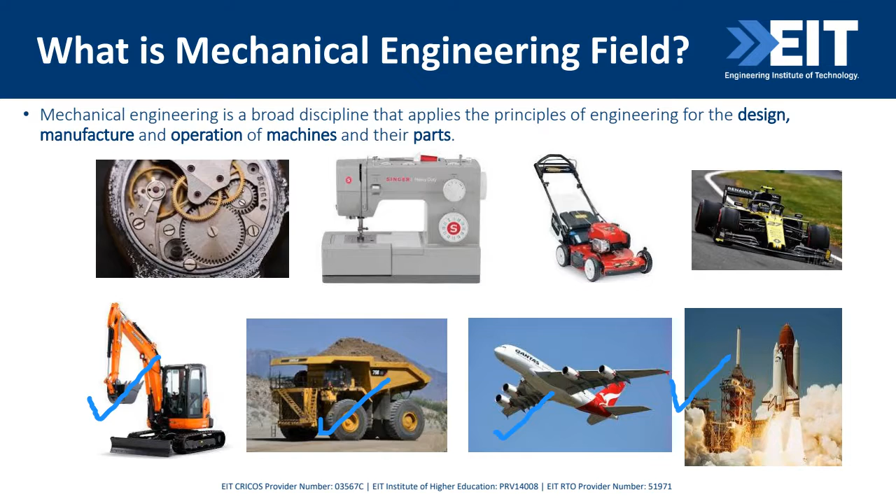All right, so moving on, elaborating a bit further.

So there's a lot of industry interest, and there are infinite possibilities in terms of mechanical engineering. It's really hard for me to think about any area which is not supported by mechanical engineering at any stage of the design process. You will need a mechanical engineer whenever you're designing something. So the field is that broad and that important, I would say.

To give a bit more idea, mechanical engineers create manufacturing facilities which would have large machines, a lot of automatic machines as well, and those machines serve so many other industries too. Mechanical engineers are also responsible for coming up with transportation systems and the automobile industry. In addition, we develop specialized tools and equipment, both for personal use as well as many other important fields like space, aerospace, oil and gas, mining, healthcare, and whatnot.

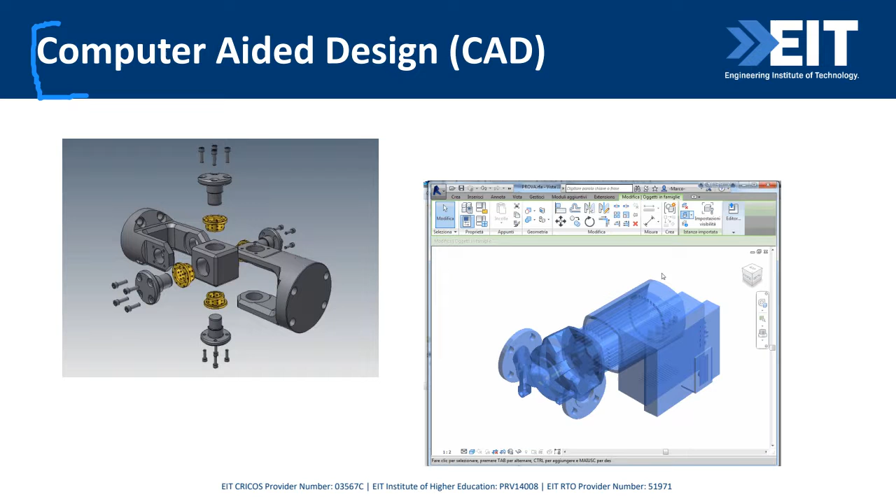For computer-aided design, they use special software and simulation that helps them evaluate those products in terms of stress and strain analysis, and whether they will sustain the forces they'll come across while in operation. This also ensures those systems will meet performance requirement standards and regulatory requirements as part of the design.

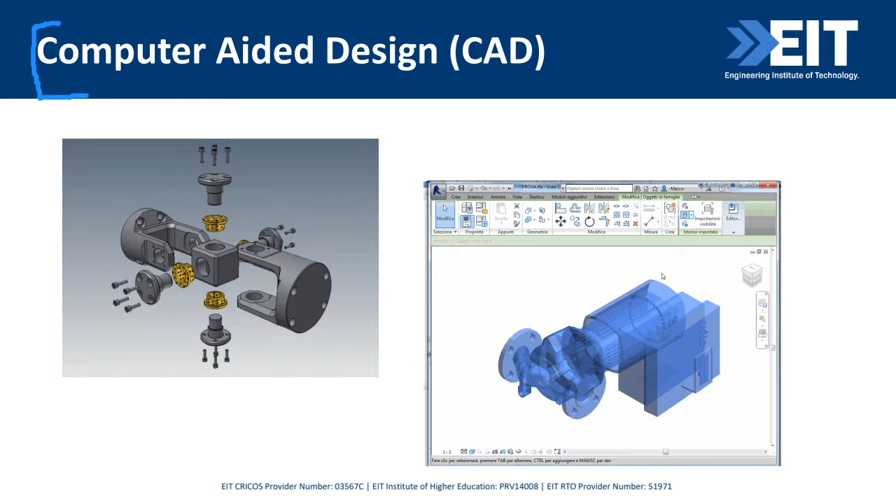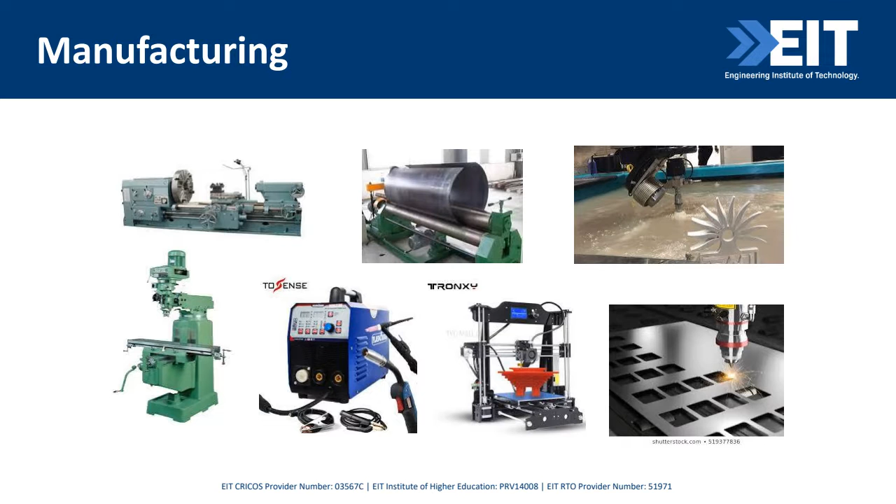Manufacturing - manufacturing and mechanical engineering, I would say they are synonymous with each other. Manufacturing engineering is a very integral part of mechanical engineering, which encompasses this whole branch. Whenever any machine is involved in manufacturing any part or carrying out any operation related to manufacturing, it sits under mechanical engineering. Mechanical engineers oversee the entire production process with manufacturers, and ensure that products are built correctly and efficiently.

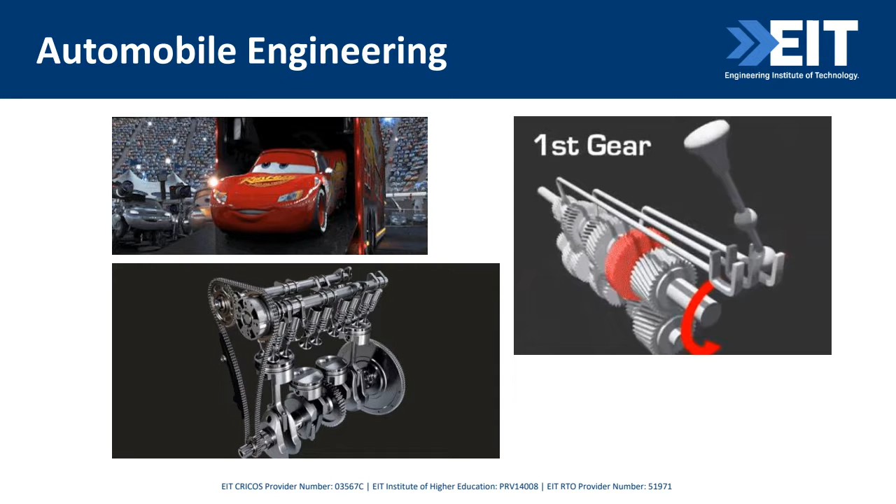Coming to automobile engineering - automotives work on the design part, not just design. It has a lot to do with material selection, thermal and thermodynamics principles, and also aerodynamics, because we want our cars and automobiles to be efficient aerodynamically so that we get fuel efficiency. This is also part of mechanical engineering that uses a lot of basic principles from the branch.

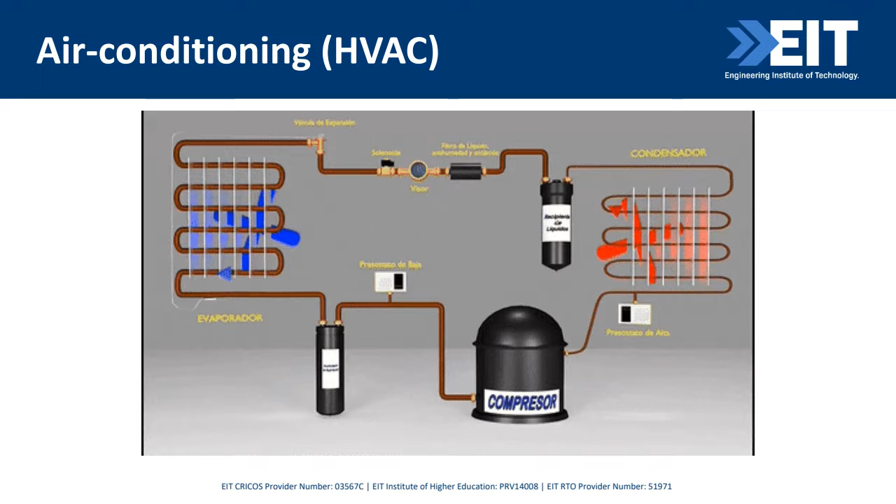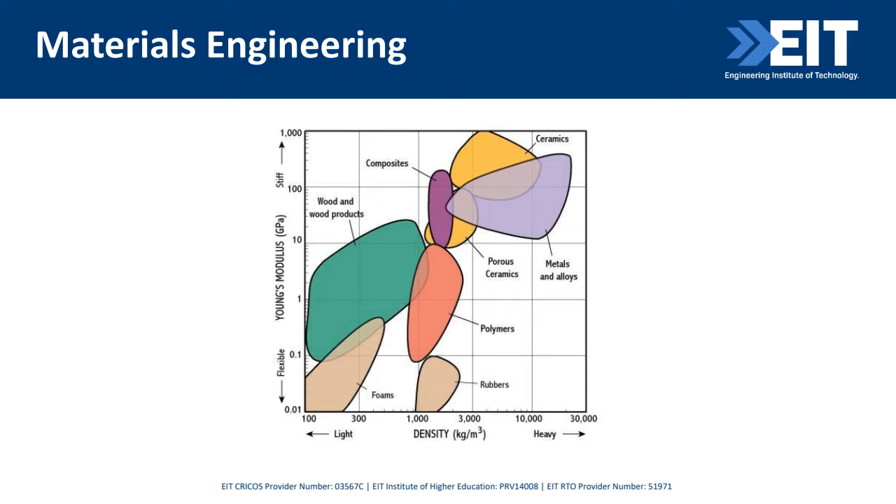Next is materials engineering. This particular branch of mechanical engineering takes into account various properties of materials, and analyzes them for stress, strain, and other required properties for a given application. Knowledge in this area is super important for designing structures as well as mechanical components. A certain component needs to serve or function in a certain environment, and there are constraints you need to fulfill through the selection of materials.

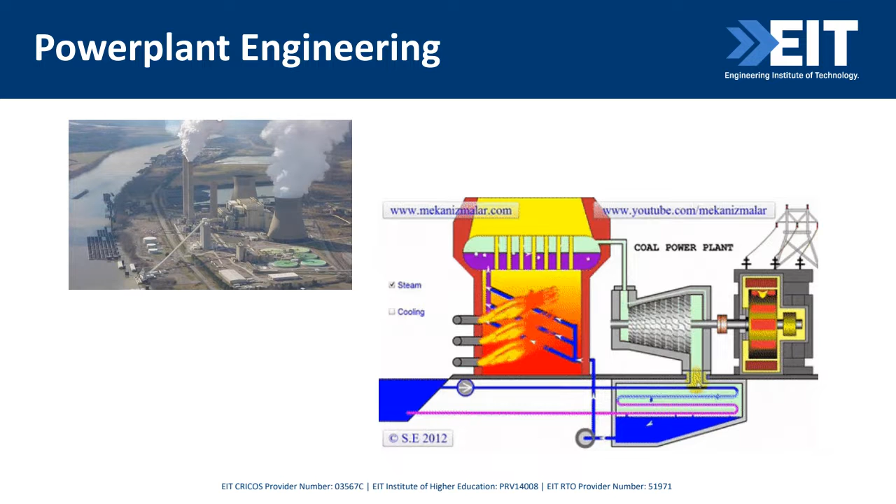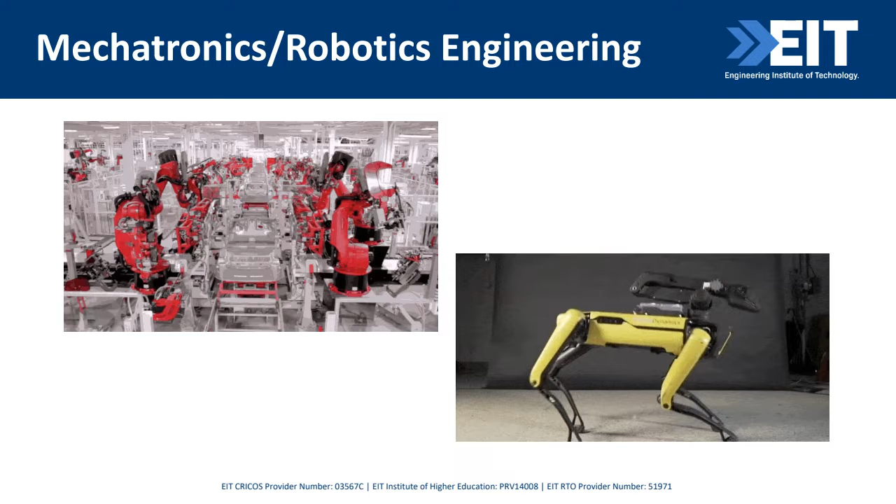Next is mechatronics and robotics engineering. Mechatronics integrates mechanical engineering with electronics, as the name suggests, along with an amalgamation of computer science and control engineering. It's mainly used to design intelligent systems, robotics, automation, etc. So that's where it's a combination of mechanical and electronic.

Next is agricultural engineering. You might ask, agriculture has a lot to do with farming and those sort of processes. But if you think about the equipment used for that, and also the automation needed in countries like Australia, where we have huge farms and not enough manpower available, you'll see clearly there is a huge role that mechanical engineers play in designing that equipment and maintaining its efficiency.

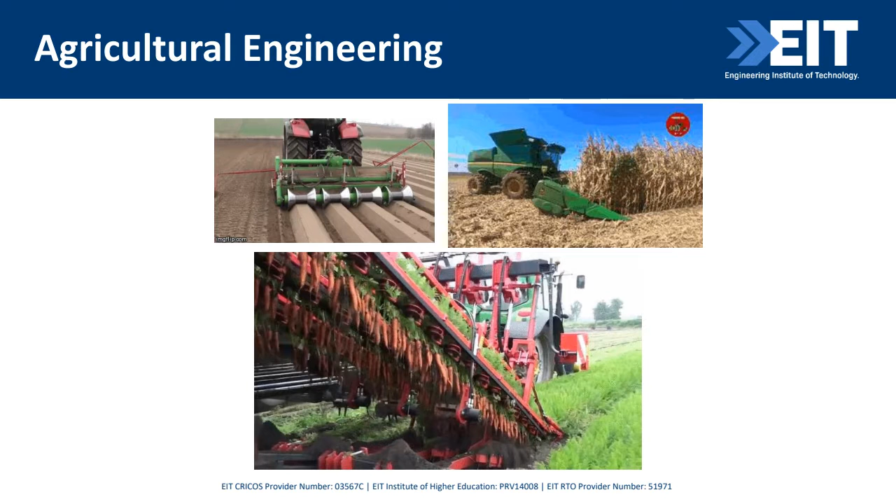Next is mining engineering. While it's quite distinct in focus, with its emphasis on mining and extraction of mineral and resources, it does share fundamental principles with mechanical engineering. Mining covers design and operation of the mechanical side, including drilling rigs, crushers, conveyors, and other material handling equipment.

Then we have oil and gas. Again, this has a quite different focus compared to mechanical engineering, but there are quite a few mechanical components involved - the whole rig, the pipelines, and a lot of pumps are also being used. These are all parts of mechanical engineering, and that's where mechanical engineers play a huge role in the oil and gas industries.

We have marine engineering as well. Marine engineers are responsible for designing, analyzing, and maintaining mechanical systems on ships, including engines, propulsion systems, and auxiliary machinery. Marine engineering is quite interesting because a lot of principles from mechanical engineering go into designing those vessels - thermodynamics, fluid mechanics, hydrodynamics, so many different principles combined to design a super efficient vessel.

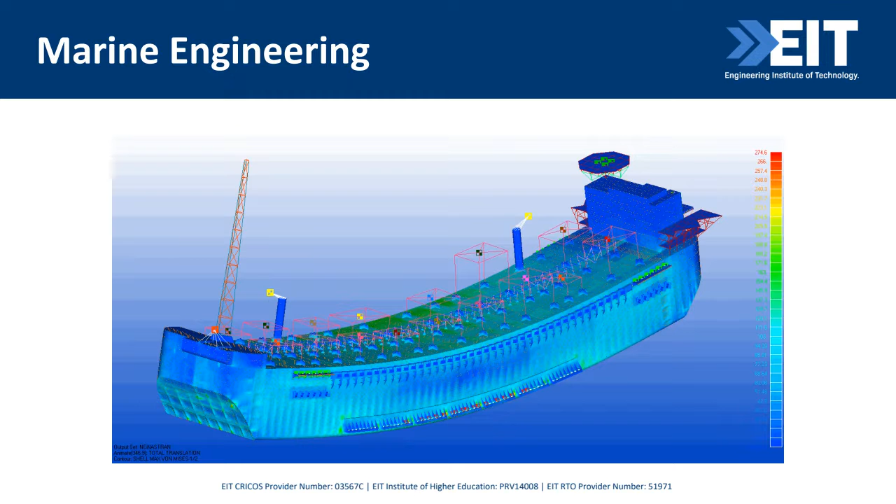I think this one will be the last one, aerospace engineering. As I've been explaining throughout all these slides, you might think about this as well. Aerospace engineering focuses on the design, development, and testing of aircraft, spacecraft, and other related systems. Propulsion engineering, thermodynamics, thermal engineering, fluid mechanics - all of those play a super important role, as well as material selection, since we're always trying to achieve the lightest aircraft with the highest weight carrying capacity and greatest efficiency.

So I hope I have made it clear to you where exactly all those things sit under the big umbrella of mechanical engineering.

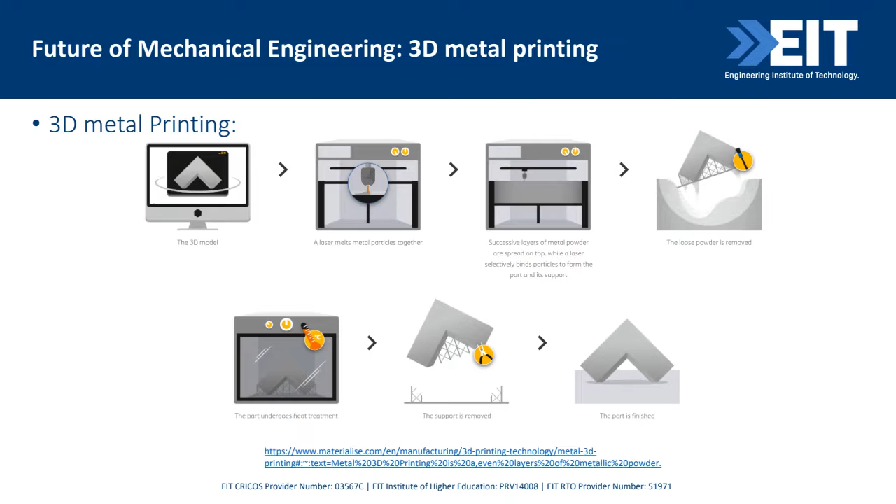After 3D printing, we are now also looking into 4D printing. Where did this fourth dimension come from? The 3D product we saw a while ago was very much a rigid product. Nowadays we are looking into 4D printing, where the fourth dimension involves the ability of the material to deform or change shape due to some sort of external stimulus. For example, we've got these hydrogels and piezoelectric materials, which may react to changes in temperature or pressure. So material like this could be developed in 3D, and the 4th D is to change the shape in order to create designs, in order to create some sort of application. 4D printing is widely used, and is coming up quite fast.

We can use that for repairing pipes. In the case if a pipe needs to be repaired, we can easily send materials like this, which can deform itself in order to close the gap. So a very important, interesting area to look into.

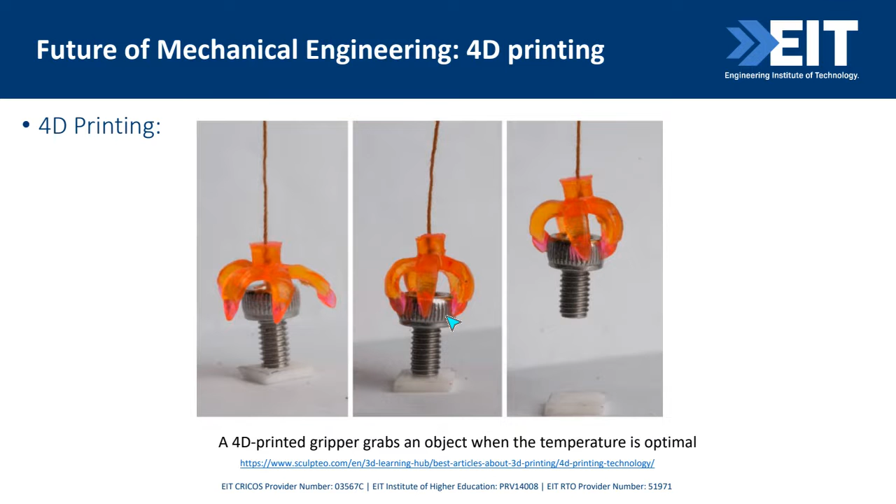Computational fluid dynamics is an area we widely look into whenever we talk about flow, whether designing aerodynamic aircraft shapes or automotive chassis, or analyzing flow in valves and pipes, even flow in our heart. CFD has been around for quite some time and has a lot of potential. You could be an engineer literally involved in just doing CFD throughout your whole work life.

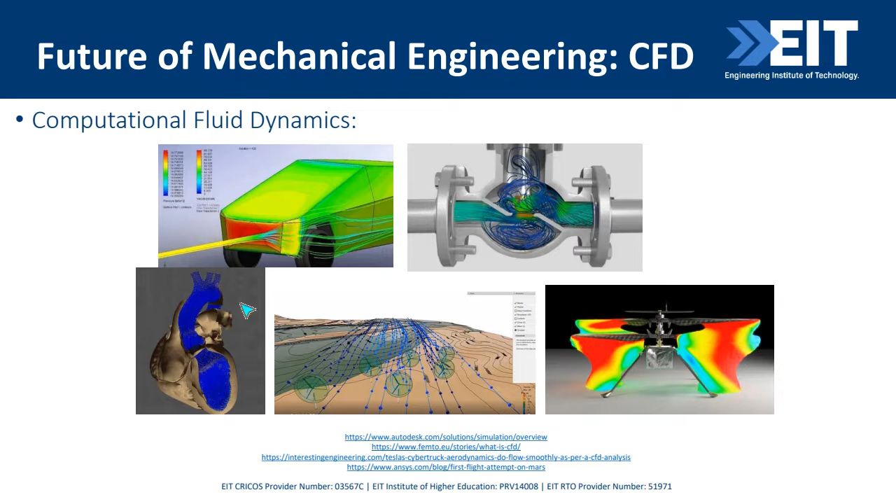Electrical vehicles - now we've got EVs coming up, a lot of electrical vehicles. But not to worry, just because we've got electrical vehicles doesn't mean mechanical engineers are going to lose their jobs. The whole concept of electrical vehicles is that the transmission part of the vehicle is going to be electricity.

But you still need to design and manufacture the car. You still need to look into the powertrains, the gear systems, the materials - materials engineering is part of mechanical engineering. We need to look into materials like aluminum and composites to make these vehicles lighter, so they can fit the required batteries. So electrical vehicles are coming up, but they are not a threat to mechanical engineers - we still have jobs in manufacturing and automotive.

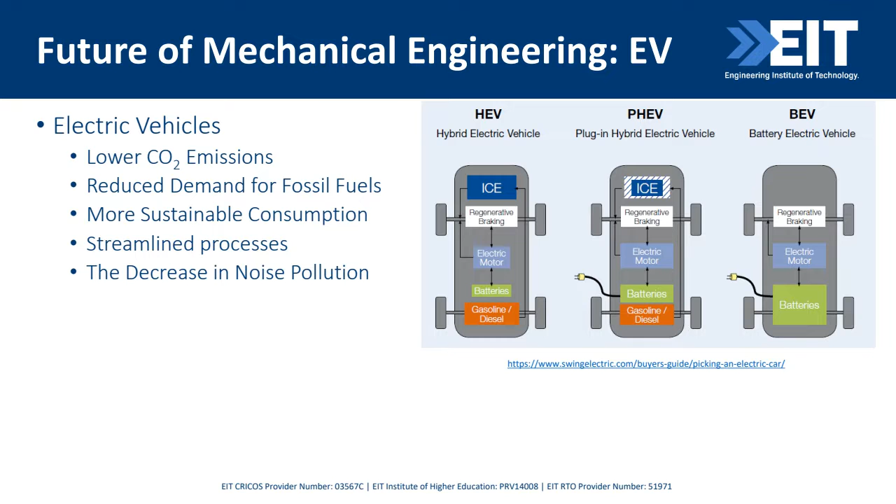What else? Nanotechnology is another area. Engineering is going nano, no more micro - we are going into nano sizes. We are looking into changes in material properties using nanoparticles. We are already building robots as small as the size of a mosquito, an insect. All of this is going into nano level, so we have a lot of design in the nano scale. Even nanotechnology involves a mechanical engineer.

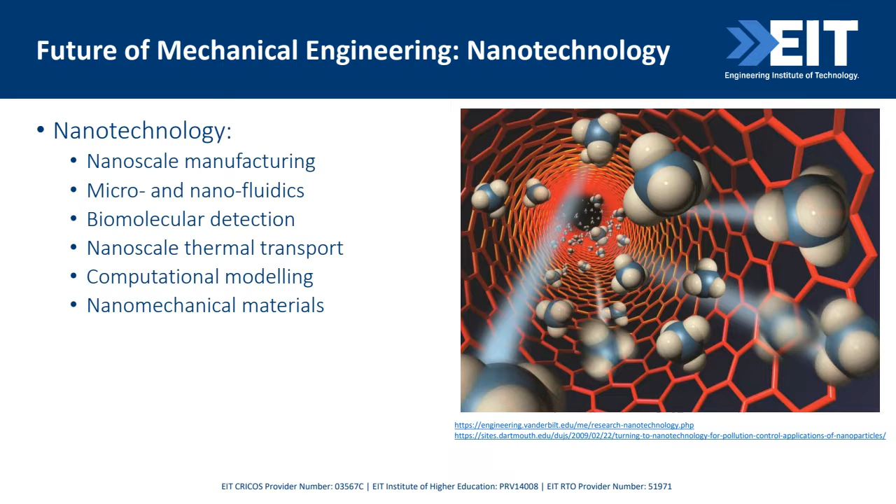And biomechatronics is another one. Mechatronics was obviously there as part of mechanical engineering, but whenever you're using a mechatronics product and incorporating it into biology, like a prosthetic arm or prosthetic leg, that's where mechanical engineers come in.

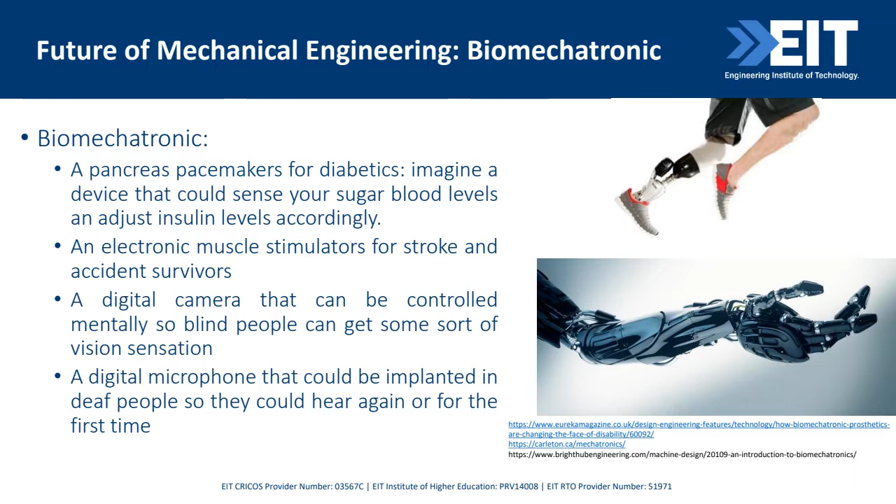Finishing off my presentation would be the introduction of Industry 4.0. Industry 4.0 is going to change into Industry 5.0 in the next 3 or 4 years, because we are already talking about Industry 5.0. But at the end of the day, what is Industry 4.0? It's the fourth industrial revolution, right? So the way industrial revolutions have actually progressed in the past.

Our first industrial revolution started with the whole concept of the use of steam power, in the 18th century. Then we went into Industry 2.0, the second industrial revolution, where mass assembly and mass production were talked about. Then Industry 3.0 is very much where we were before, and then we did 3.0 to 4.0, where we looked into the use of computers in manufacturing.

Industry 3.0 going into 4.0 uses connectivity - there are 4 things we look into in 4.0: connectivity, data connectivity, the use of internet and so on; analytical intelligence, that is AI, artificial intelligence; human-machine interface; as well as advanced manufacturing. If you notice, advanced manufacturing, human-machine interface, as well as AI are obviously part of mechanical engineering. So when you combine all of that, you've got Industry 4.0.

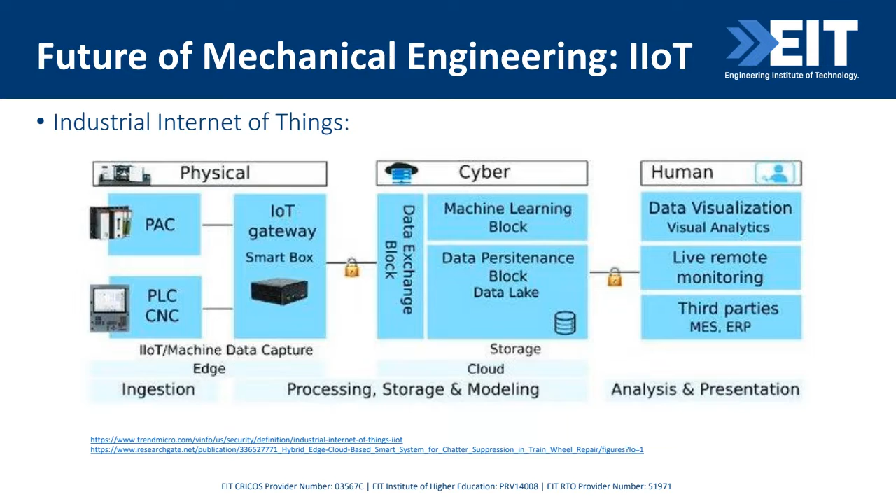Industry 4.0 looks into merging all of this, so we're looking into manufacturing in a different way rather than the traditional manner. We are looking into integrating information, either in manufacturing, design, procurement, logistics - everything being put together, in order to create well-efficient manufacturing. So 4.0 is what we are looking into, but we are already going into 5.0, just to let you guys know.

As part of 4.0, there are some other aspects that require a lot of improvement and are being widely researched - that is the digital twin. We can develop simulations that replicate the actual system, so rather than doing experimentation on the actual system, we can do a simulation in this digital twin and work out areas for improvement, and areas where there could be some sort of problems. So digital twin is obviously part of Industry 4.0.

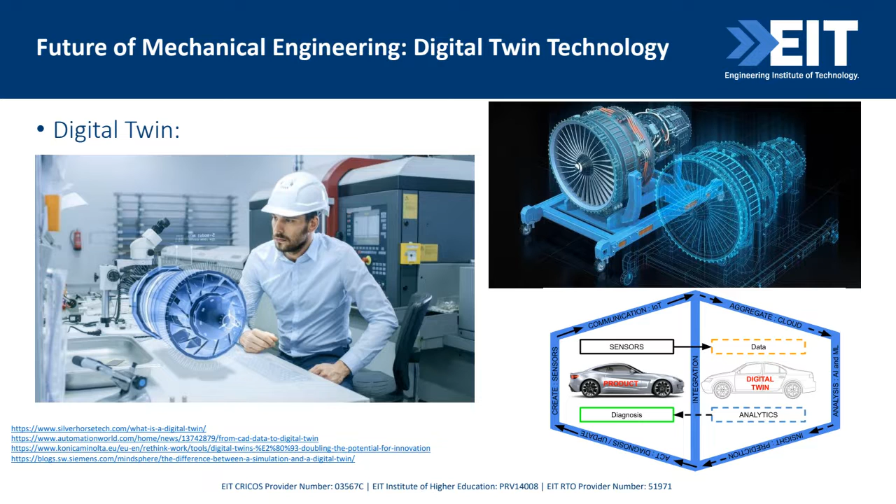And apart from that, as I was saying, it's not only about the engineering part, it's also looking into the procurement part, the logistics part. So we've got data management - how data can be disseminated, processed, and stored. All of this comes under the huge umbrella of Industry 4.0. And finishing off my presentation today is product life cycle management, another area that comes under manufacturing.

But as I said, manufacturing has shifted to a slightly different paradigm, so we are looking into internet automation and so on. Now, to finish, Industry 5.0, which we're looking at somewhere around 2026, 2027 in the near future, involves the integration of robotics. So mechatronics and robotics is the area a lot of people will end up working in over the next 5 to 6 years. Don't be surprised if your co-worker is simply a robot - even though that's how things are now, it will be more extreme at that time.

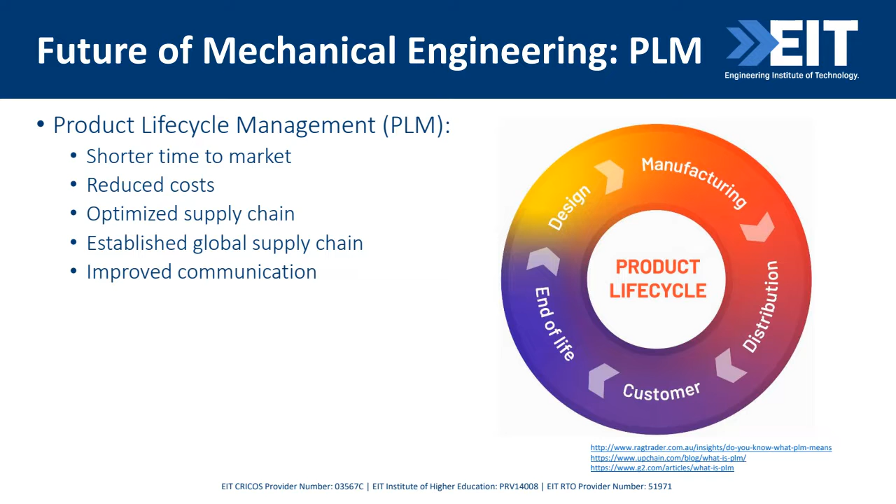Thank you, Dr. Arvind. I'm really excited to welcome you all again to this session, and thankful to Dr. Aarti and Dr. Arvind for giving a fabulous introduction and overview of the entire mechanical engineering branch and its variety of sub-disciplines. I'm sure all attendees are now curious and excited to learn about the different courses EIT offers, which can help them upgrade or join mechanical engineering, because it's the evergreen discipline of engineering. If you become a mechanical engineer, you're employable almost everywhere in the world. So let's dig deeper into the actual courses.

In terms of EIT offerings, we offer the full range. Even if you want to start with a small advanced diploma type course in mechanical engineering, you can start with that if you have some trade background. If you've completed year 12 in high school, you could join an undergraduate certificate followed by a Bachelor of Science in Mechanical Engineering. A higher level would be a graduate certificate, more like the start of a postgraduate certificate. Then we offer a Master of Engineering in Mechanical, or you could complete a graduate diploma into a Master of Engineering. We also offer a Doctorate of Engineering in Mechanical - fabulous, covering all the way from advanced diploma to doctorate, almost all AQF levels from level 6 up.

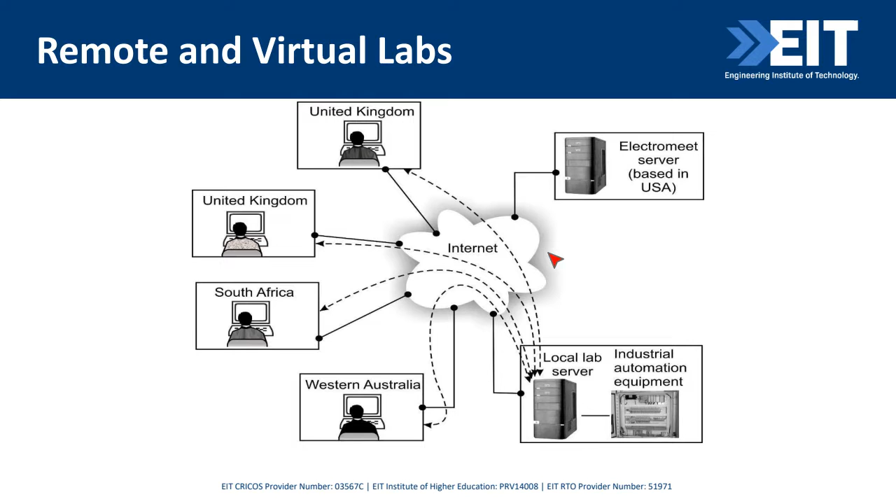Next is mechanical engineering labs. People usually ask, you run exactly the same bachelor's and master's fully online and also on campus, so how do you do your labs? We actually have remote and virtual labs all over the world, with servers in Western Australia, South Africa, United Kingdom, and so on. These servers are all connected, so it doesn't matter if you're on campus or online, you can remotely access these labs from anywhere in the world, 24/7.

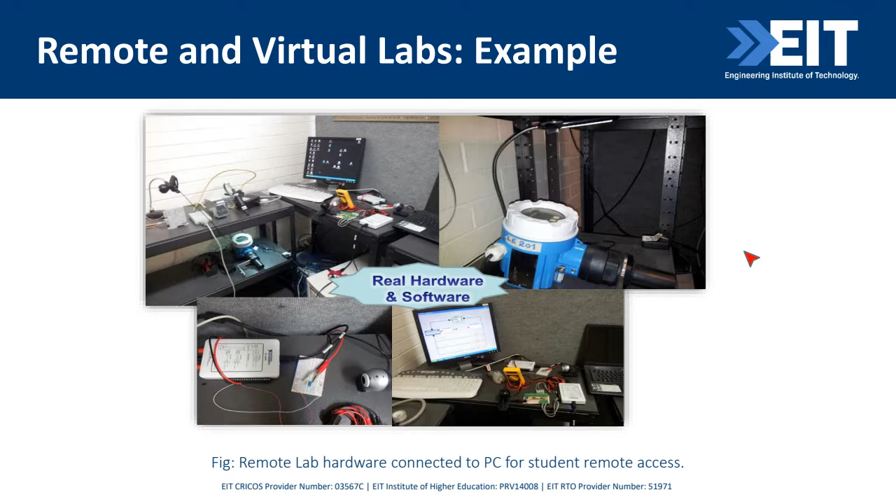In a traditional lab, if you miss it because you were sick, you wouldn't get to do that lab again, right? But with EIT, these labs are accessible 24/7 and you can do unlimited attempts. Want to do one lab 5 times or 15 times, there you go, you can do it. You can even log into that lab at 3 a.m. in the morning. That's what happens in our labs here in Australia, students logging in and doing experiments in the middle of the night. Our lab is always buzzing with activity because we have students from all around the world.

And so that's the remote lab. We also have quite a few expensive software which are used in mechanical engineering, like AutoCAD, Automation Studio, Python, MATLAB, SolidWorks, ANSYS, Festo, FluidSim, Gesture, Simtronics.

All of these softwares are quite expensive, so students would normally struggle. They have to book a lab in a traditional university setup, right? Or if they're doing online, they can't really access any of the software, and they can't purchase them because they're quite expensive software. So what we did at EIT, we actually installed all of these softwares in our international servers.

in WA, in United Kingdom and South Africa. These servers you can remotely join from anywhere in the world using just your laptop, and you can access all of these softwares remotely, and you can do all the work, and you don't have to wait for booking, going into a room in the daytime during work hours. So these softwares are available 365 days, 24/7, and that's the beauty of EIT's software and hardware labs.

I can give you some examples. For example, in CAD/CAM, you would be doing computer-aided design and manufacturing. It means you would be designing and drafting quite a few mechanical components which could be used in vehicles or machines or spacecraft. All of these could be done here.

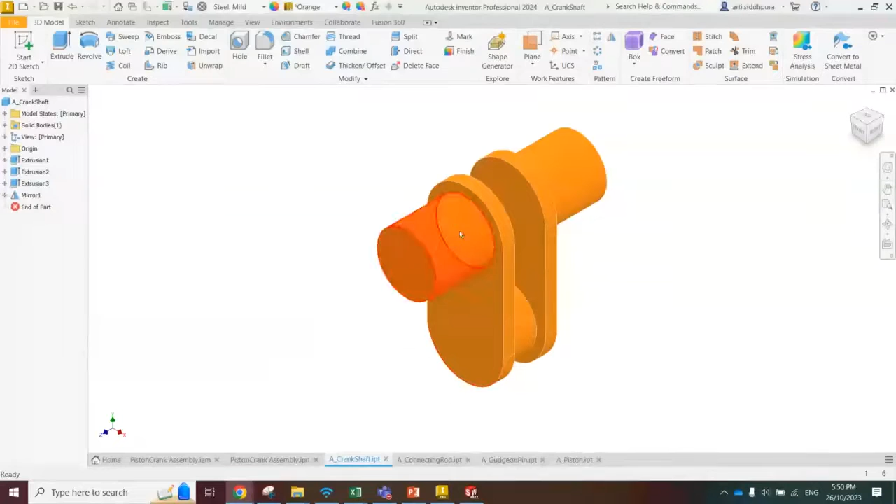So students usually learn how to prepare this sort of parts. They prepare or create the parts, they put them together into this sort of assembly, and they also prepare some really nice presentations using the parts that they have created. It's really great to see the students starting from scratch. A lot of them are fresh from high school and still learning through the journey, and towards the end of the journey, feeling quite confident and just working with those drawings.

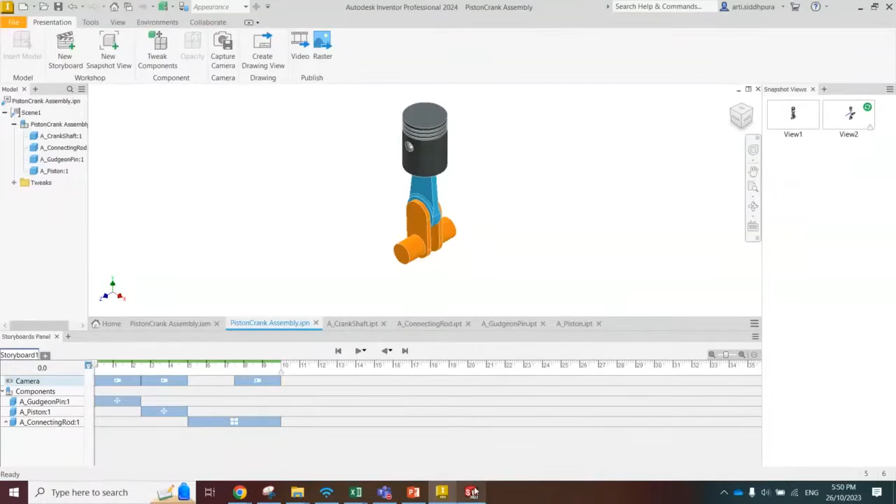Now, working drawings are an inevitable part of any engineer working in industry, so we have a lot more focus on what actually industry needs. But that was just a sneak peek for what the students start with. And this is the second part where they would actually do some more in-depth analysis.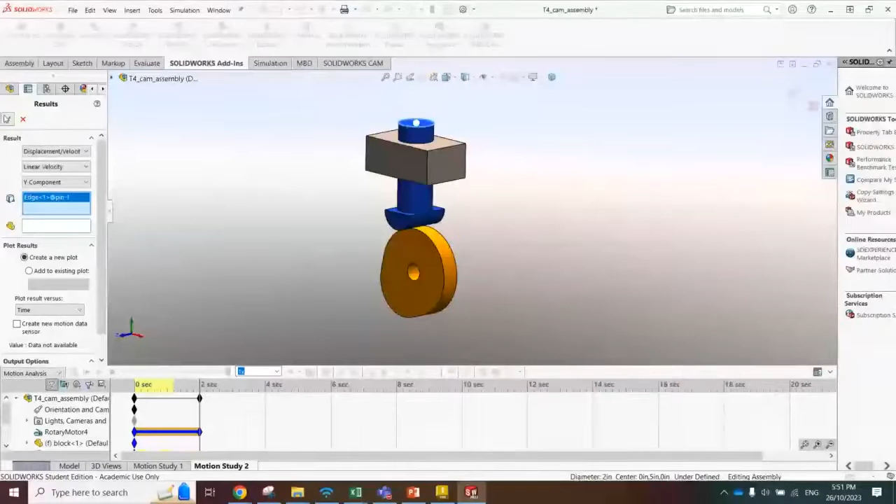Say, for example, if you want to see some sort of velocity, we can quickly select components and just give it a go, and it will create the velocity plot. So this is what our master students do in terms of CAD/CAM. This is just a part of it, not everything that they do. I'm just trying to give you a bit more of a sneak peek. But that's from my end in terms of CAD/CAM — that's what you'll be learning if you join bachelor's or master's.

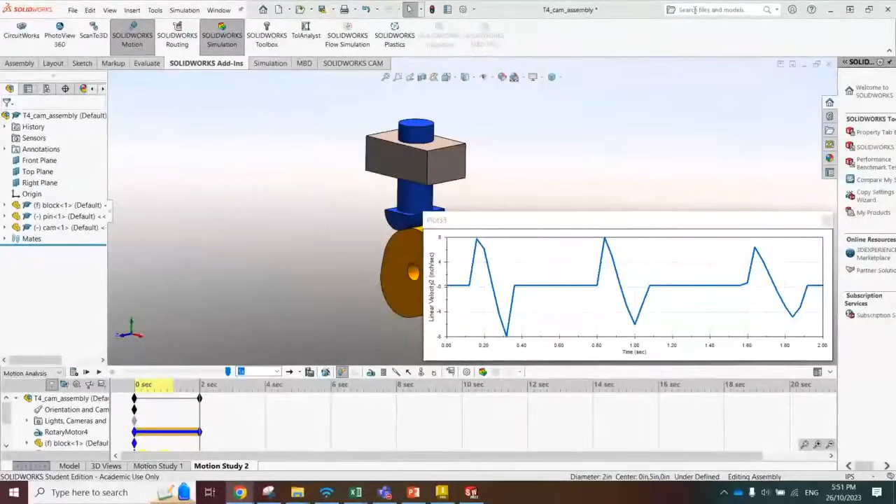Thank you very much, Dr. Aarti. It was a very good insight into the CAD/CAM softwares like Autodesk Inventor and SolidWorks. That's a beautiful simulation which you have shown us. And getting back into the slides, just give me a few seconds, I need to reload the slides — won't take more than a few seconds.

So yeah, that's what we do in mechanical engineering. We solve everyone's problem, whether you are working in mines or wanting to work in mines or marine or space science, aeronautics, vehicle design, automobiles — anything you name an industry. Even construction industries are requiring lots of mechanical engineers.